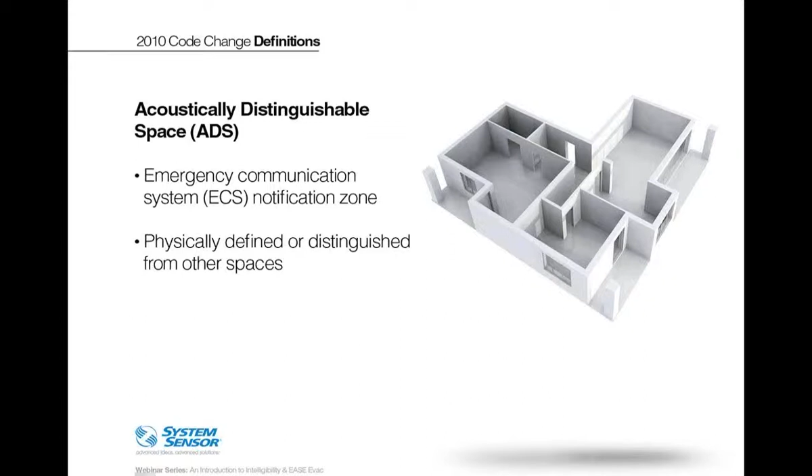Okay, now an acoustically distinguishable space, or an ADS for short, is one of the most important new definitions in NFPA 72. And you'll be using this term a lot if you're designing or installing systems that require intelligibility. So NFPA defines an ADS as an emergency communications system notification zone, or a subdivision thereof, that might be an enclosed or otherwise physically defined space, or that may be distinguished from other spaces because of different acoustical, environmental, or use characteristics such as reverberation time and ambient sound pressure levels.

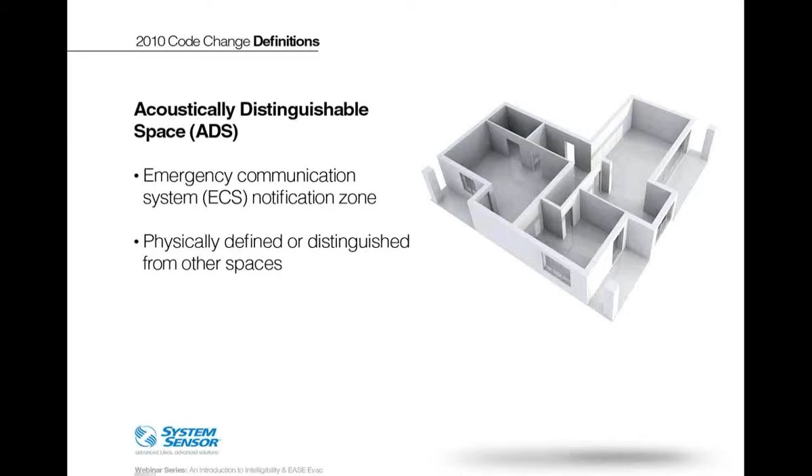So now let's talk about who identifies ADSs and how they are used in the design and installation of an actual voice evacuation system. The code covers the application of ADSs in Chapter 18, which is notification appliances. So first, it is the system designer who determines how a space or facility should be broken down into specific ADSs in the planning phase of the project. And the designer also determines if intelligibility will be required in each distinct ADS. And of course, when or where required, the code also makes allowance for the AHJ to review and approve once the plan is completed.

So let's look at ADSs in a little bit more detail. So as you know, ADS designations are established at the beginning of the project. Specifically, the designer makes decisions about ADSs based on the building characteristics and usage. Typically, the designer will segment the building or space based on the physical barriers. So we're looking at walls and doors, any material changes like different types of material used on the walls, ceilings, or the floors, and the expected ambient sound levels for that space. Once these designations are made, the designer will then decide if each specific ADS should and will require intelligibility in that space. The same type of factors that drove the ADS designations will come into play here.

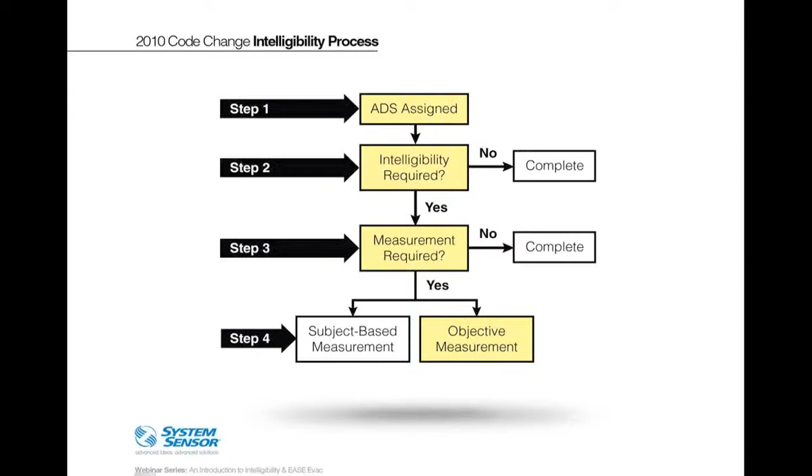Other additions to the intelligibility code include the new Annex D and acceptability criteria. So Annex D is brand new, and it's intended to provide guidance on planning, design, installation, and the testing of voice evacuation systems. And the majority of this annex contains recommendations for testing of the intelligibility of the voice system. So I would recommend for anyone who is new to these code changes or is now designing and testing systems, Annex D is a great place to start to get a lot of background information and learn more about the new requirements.

The acceptability criteria state that the intelligibility of an emergency communication system is considered acceptable if at least 90% of the measurement locations within each ADS have a measured STI of not less than 0.45 and an average STI of not less than 0.5. So the STI scale is a scale from 0 to 1. So what NFPA is looking for is right in the middle of that scale, a 0.5. So I think that's considered a fair score on the STI scale.

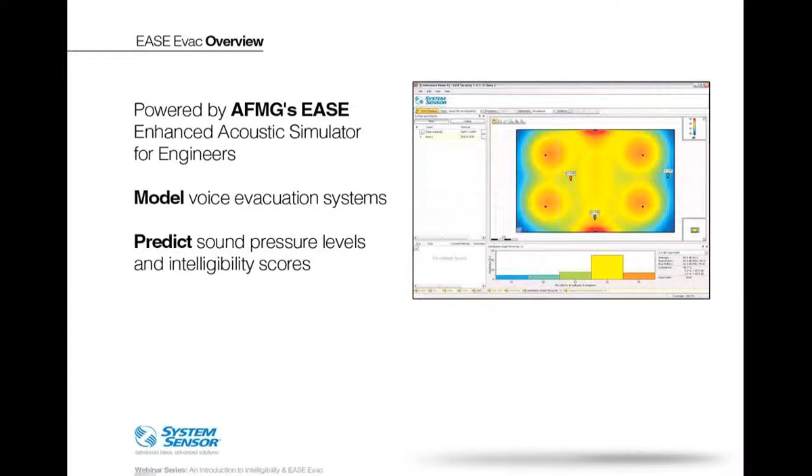Now I want to mention that it's been scaled for the life safety market, and the purpose of it is to be pretty intuitive to use. There's a comprehensive user's guide that comes with the software that really walks you through all of the features and functionality of the software. So that's a great place to get started to learn how to use this for your needs. Currently, EASE Evac comes preloaded with System Sensor SpectrAlert Advanced speaker data for quick and efficient design of voice evacuation systems. Since SpectrAlert Advanced devices are the leading AV notification devices on the market, this should be a big benefit and time saver if you are designing voice systems.

I'm going to talk a little bit about how the software works. You can import your acoustically distinguishable spaces either by manually inputting room dimensions into the software, or you can import a blueprint and trace the dimensions within as well. So it accepts JPEG, TIFF files, CAD files, and that's the way you can get your room within the space as well.

It includes an absorption materials database. So we talked about the room furnishings being a key piece of the intelligibility puzzle. So you will have to go in and tell the software what type of materials you are using on your walls, your ceilings, your floors, and if there's any large furnishings or cubicles within the space that you want to account for. You then manually input where your speakers are and what they're tapped at.

And then the software provides an intelligibility prediction, either in STI or CIS, and then a sound pressure level prediction in decibels. And lastly, it's going to provide a comprehensive report of the design that you did within the software. This can be included in the job file for the building owner or the AHJ.

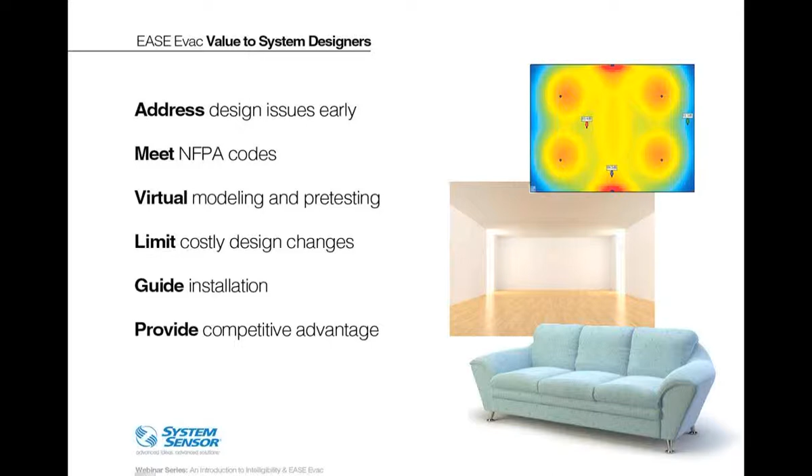We also think it could offer some value to AHJs. Again, it's going to provide that documentation on how and why the system was designed the way it was. And it's going to reveal potential issues to discuss and address early in the design phase of the project. So you can start working with your AHJ on, this area we're just really concerned that we will never be able to meet intelligibility. So maybe you use a different type of speaker or you go to a different type of notification for that area. And you can talk about that during the design phase instead of when the building is supposed to be commissioned.

It also could offer value to building owners. So it's going to reduce the chance of a non-code compliant system that could possibly delay commissioning. It will raise their confidence level that the voice evac system will be intelligible during an emergency to properly guide the building occupants. And lastly, again, it's going to reveal potential issues during the design phase instead of at the end of the project.

So now I'm going to walk you through what the software actually looks like. So bear with me as we switch applications. And David, can you see the software? I sure can. It probably will be showing up for the attendees in the next couple seconds.

Okay. So I'm going to walk you through quickly how you could design an acoustically distinguishable space within the software. It's basically a series of tabs that you'll walk through. The first tab is your project information. So what the project is called, who is the designer of that system, your company's name, and then any notes that you would like to see on that final report out, you can type here.

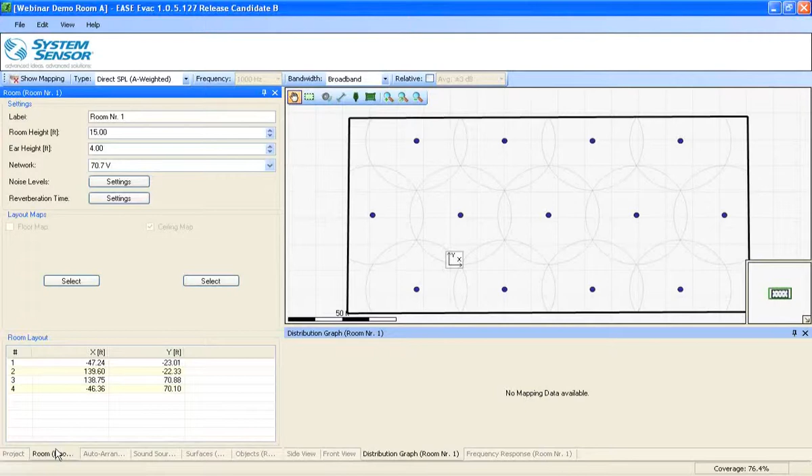The next tab is where I'm going to enter my room information or my ADS information. So I'm going to look at my ceiling height in feet, the ear height or listening level. This is where the mapping occurs within the space. What type of network I'm using. Noise level, so this is going to be my ambient sound levels within the space. And then here is where you can either upload a floor plan, a JPEG, CAD file, TIFF file, or you can down here manually enter the dimensions of the space, which I've already done.

The next tab is where I'm going to quickly get my speakers within the space. You'll see here on the drop-down menu is where all of the System Sensor speakers are already preloaded. For quick and easy design, here's where you choose your tap settings. So for System Sensor, we'll be looking at between 1/4 and 2 watts. And then the overlap type. This is how you want your speakers spaced within the room. So edge to edge, a minimum overlap, center to center, or you could choose a distance. Say you know you want to start off with them being spaced 20 feet apart. You could do that as well.

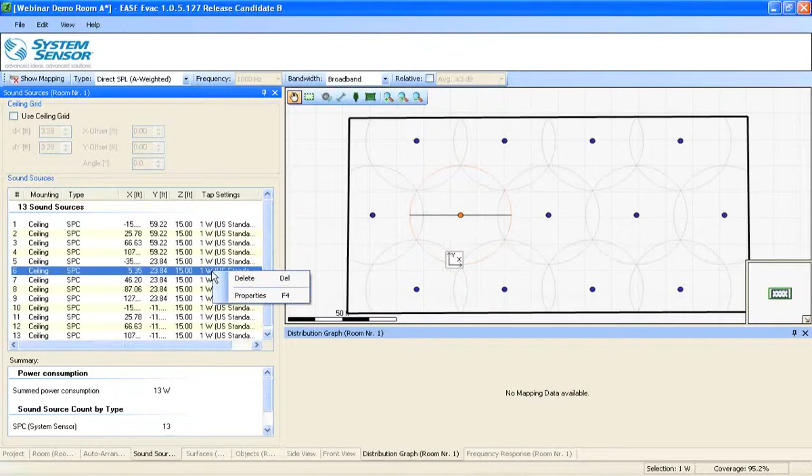On this next tab is where you can go in and individually make changes to speakers. So you can click on it here, and it's going to highlight over here. You can change any of the properties of the speaker, the tap setting, where it's located, or you can delete it. And down here it's giving you a summary of you're using 13 watts of power, and you have 13 of the SPC speakers used within the space.

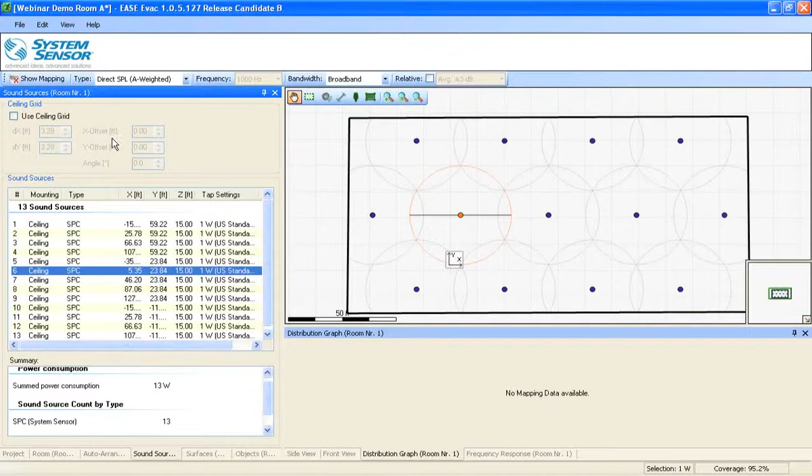Next, I'm going to turn on my mapping. So this is showing us, based on the design that we have in the room right now, what we would be looking at in terms of a prediction of sound pressure level. So you'll see here is my key over on the side, and based on how my speakers are designed right now, you know you want to be 15 dB over ambient. So you could say, well, I have plenty of speakers, maybe I'll delete some of these.

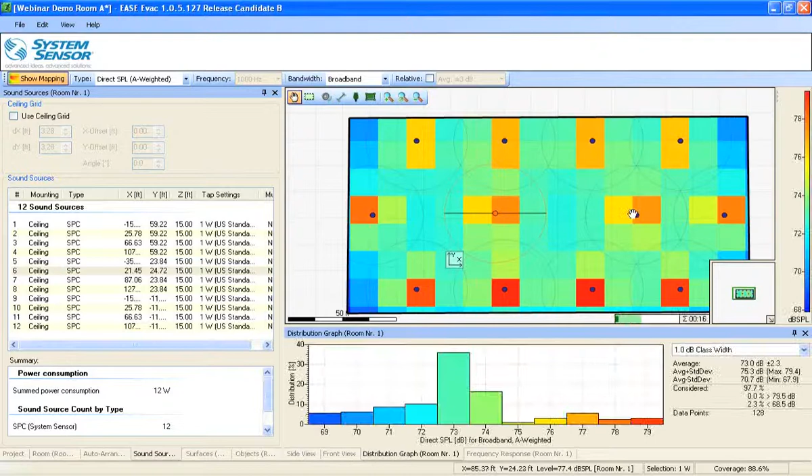And as you make changes, you'll see that the software is going to recalculate and show you how that changed your design based on the changes that you made. So it's really a neat tool to plan, to make changes. Maybe you don't know if you want to use a high fidelity speaker versus a high volume speaker. You can go in and map those two separately and see how it changes the audibility and intelligibility.

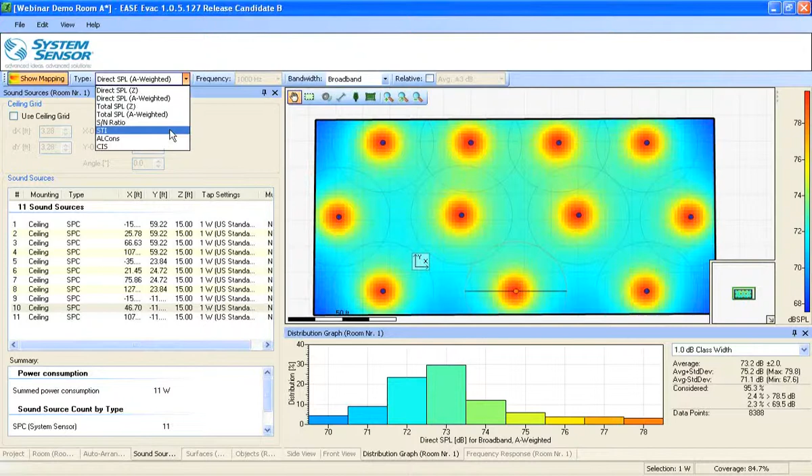So right now I'm looking at audibility. I'm going to change to STI, so we'll be now looking at intelligibility. Again, my key for STI is over here on the corner. So we're looking at a scale of 0 to 1. And based on how I have it designed right now, I'm at about a 0.6 STI.

So we know NFPA wants us to be at a 0.5 or above. So I would say, based on that, I'm meeting the requirements. So that should give you some type of confidence level as to how your system was designed.

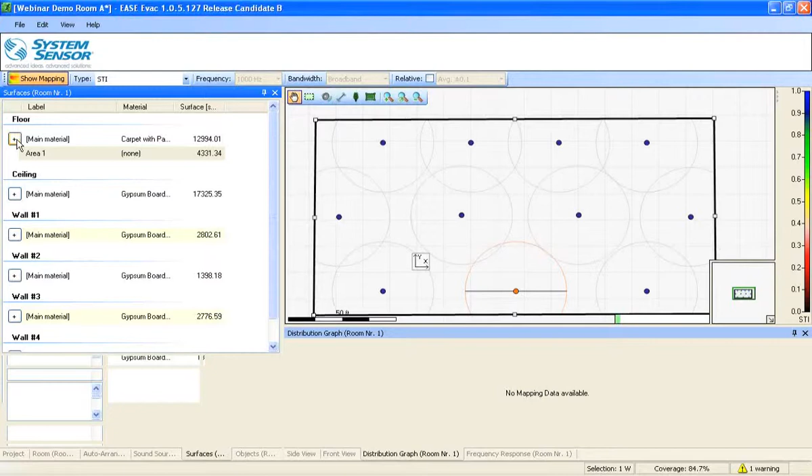Now, I don't want to forget to show you this important tab. This is the materials database that I talked about, and it's important that you make sure that this is filled in according to how your room is furnished or designed. So you'll see you can search by materials, whether it's concrete, brick, carpet, all of that is in here, suspended ceilings, and it takes into account the absorption coefficient of that material, which is then used within the software to determine an intelligibility prediction.

So like I said, there's a lot more features and functionality of the software. I'm showing you how to quickly and easily design a system, but if you had to do more advanced troubleshooting or had a more advanced room you were modeling, you can certainly do that as well. There is a user's guide that it comes with.

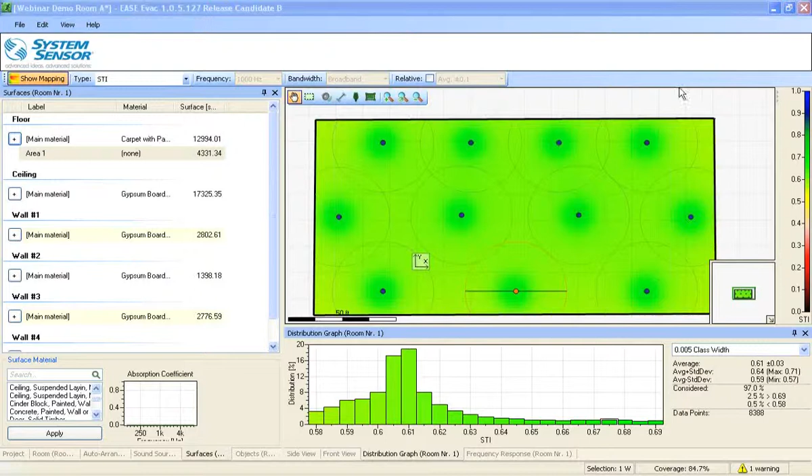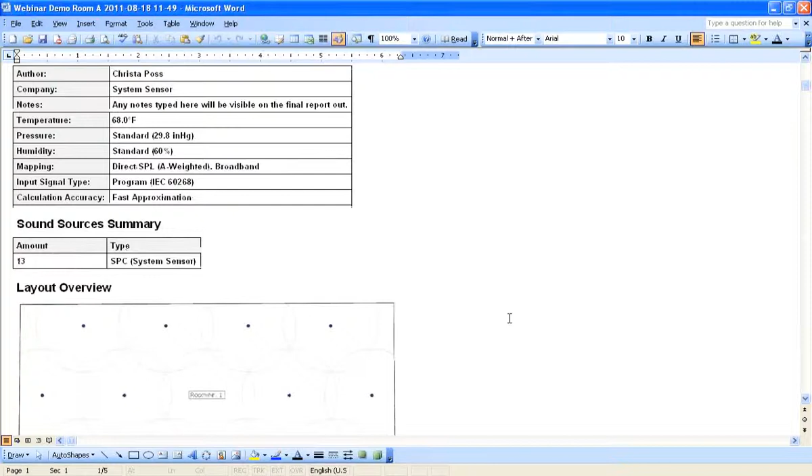The last piece I want to show you is the report out that is provided after you design your space. This is a Word document. So you'll see here, here's all the information that I entered on that first tab. It's telling me I have 13 speakers within the space. Here's how they're designed. Now, I printed this before I turned on my STI and sound pressure level predictions. If you had that turned on, this would be color-coded to show what prediction levels you were at within the space.

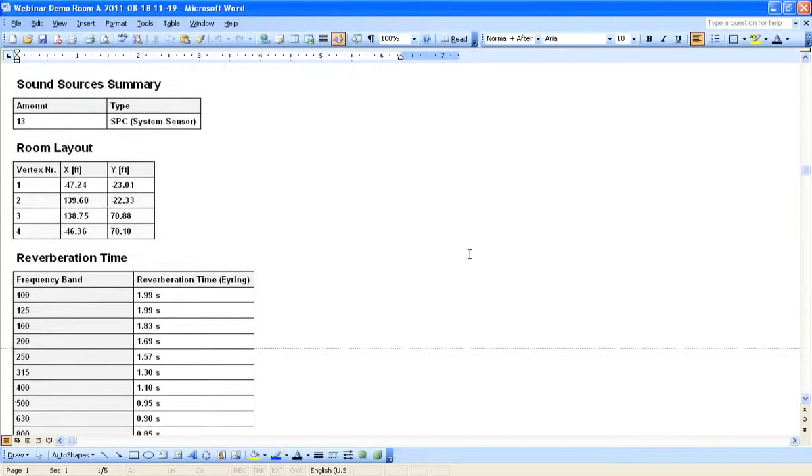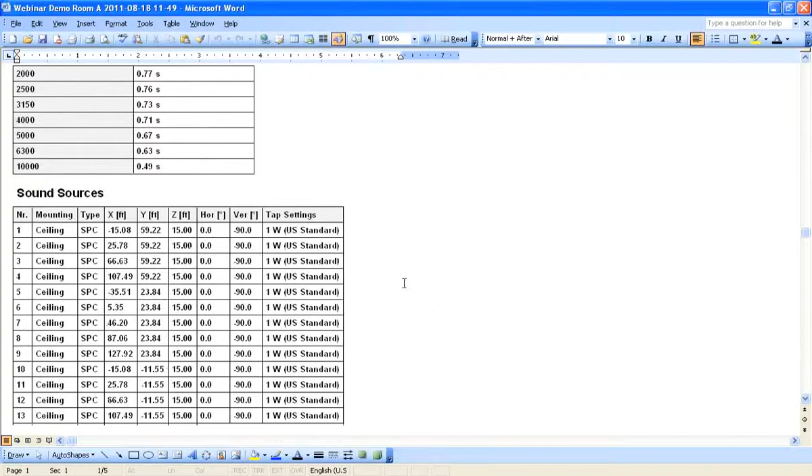Again, here's my room layout. It also provides your reverberation time that's analyzed within the software. And then here is a summary of all of my speakers and what they're tapped at, where they're located within the space. So that's a quick overview of the EASE Evac software.

We're now going to go back to our PowerPoint. And David, can you see the PowerPoint again? I sure can. Okay, great.